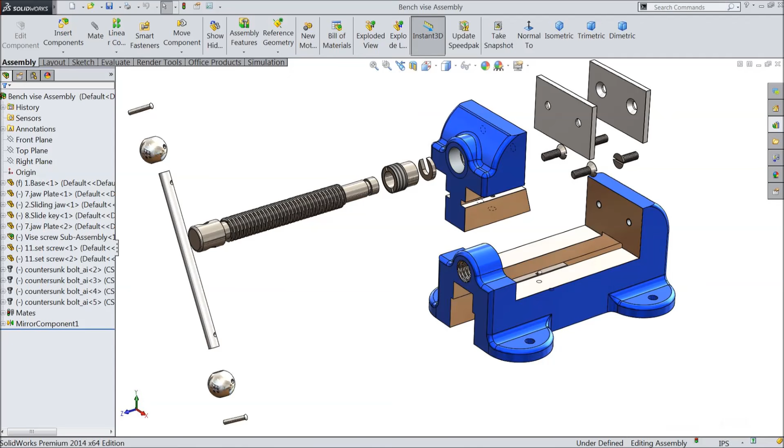So let's see how to do this in Solidworks. We will design each and every part separately and assemble at the end of the video. There are many parts, so we will make each and every part. This is a very beautiful tutorial.

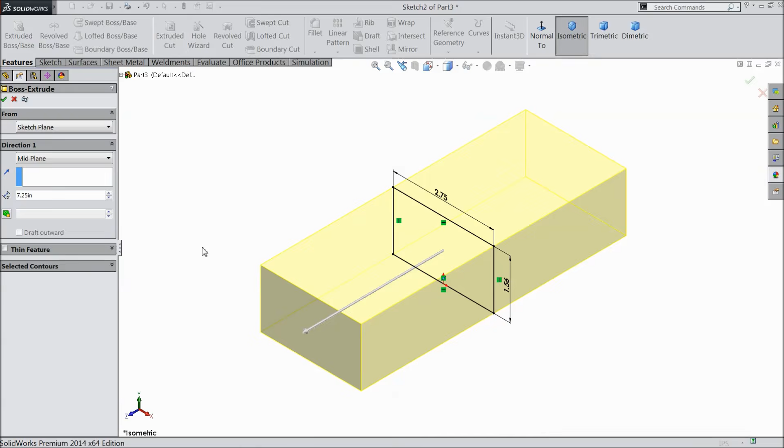Now this is our first part. Just define the base metal chrome plate. That's it. This is the base metal.

Select this back surface, sketch normal, select a line and start from this corner, go back to the point and connect up to here. Exit. Now select this line, curve and line, make relation tangent.

This is the important relation. Now let's define it: 1.25 inch, and overall height 1.75 inch, and this length...

Delete this length and define first radius: 1.375 inch. Okay.

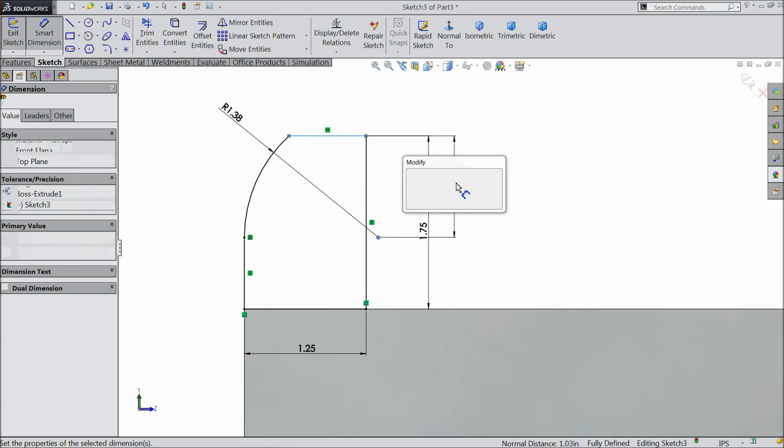Now select this line horizontal. Now define this gap: 1.17887 inch. Okay, this is our perfect design.

Now let's extrude it. Select extruded boss and here choose up to surface. Select this as a surface.

Now select this face, sketch normal. First draw a center line, make sure the line is vertical. Now define the length: 2.25 inch.

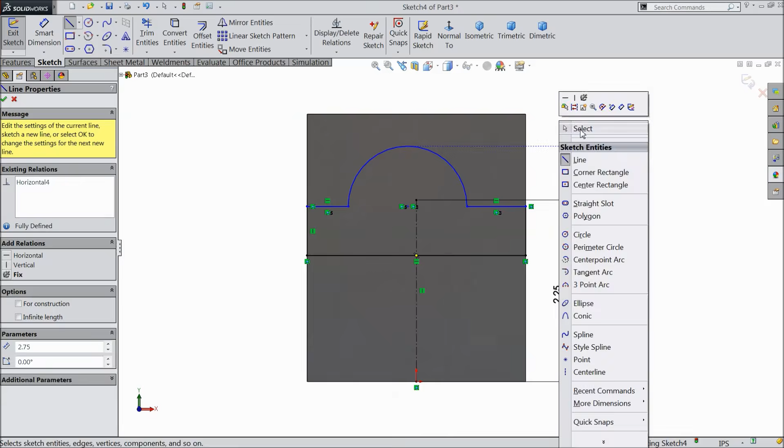Select a line, draw a line up to here and just draw a circle. Connect with this bottom line and connect this end. Exit. Now select these two lines, make relation collinear and one more relation equal.

Now define this radius: 0.687 inch. Now define the height from the origin point: 2.187 inch.

Now the design is fully defined, so let's try to extrude. Choose here offset from surface, make 5 inch, and select offset from surface, select this line, offset from this surface 5 inch, see merge result.

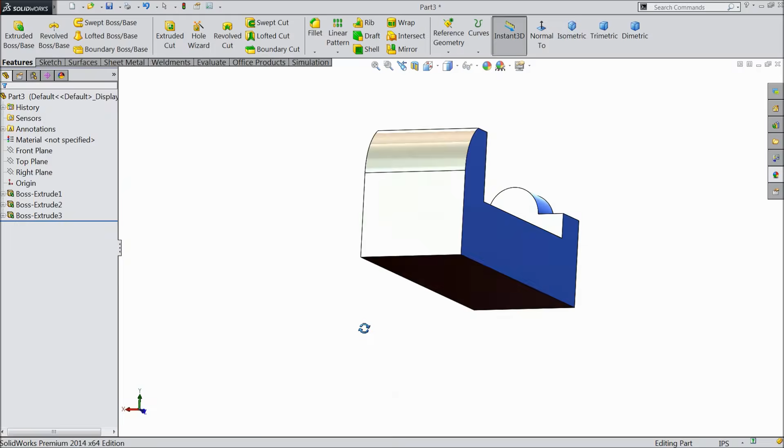Now these faces we will assign some color. Go to paint and define glossy blue. This face also, so that the design looks better.

Now select bottom face, sketch normal, and here we want to draw wings or a base. Let's select circle, draw a circle up to this end, select line, connect this end to this end, exit. Choose trim entity and trim this half circle.

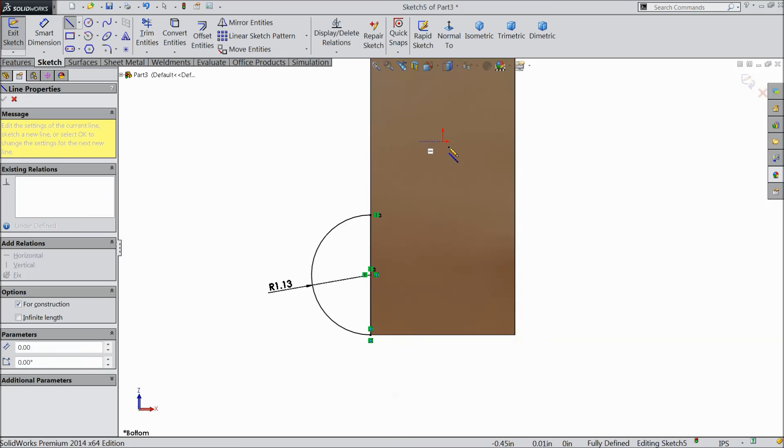Now define this radius: 1.125 inch. Now select, let's draw first, and draw a line.

Now select circle, keep the diameter 0.312 inch, and the distance from this line to this point 2 inch, and the distance from the upper mid point 2.5 inch. Okay, the design is fully defined.

Now select extruded boss. Point 4 inch, reverse direction. Select this material glossy blue.

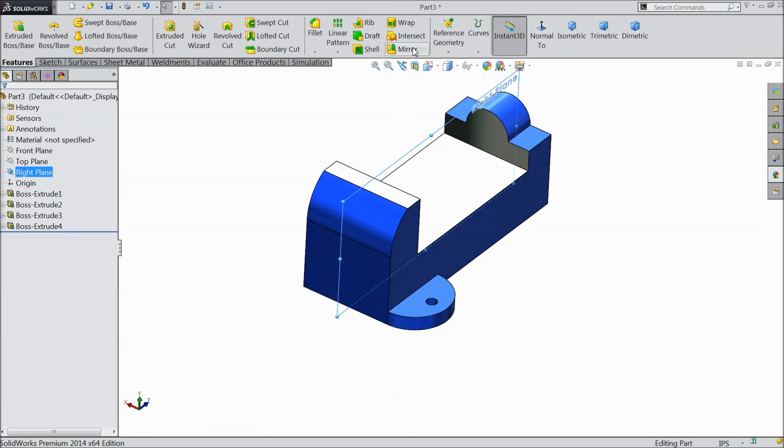Now we want to just mirror this. Choose right plane, mirror, and select extruded boss. Okay, now it is mirrored.

Now these two again we want to mirror. Choose front plane, mirror, select extruded boss, and mirror. Okay, now see the base is already mirrored.

Now we select this face, sketch normal, and here we want to create some cutout for movement, for the path. Make sure it is vertical. Now select a line.

Select this line vertical. Now select these three lines, make relation symmetric. The same for these three lines, symmetric.

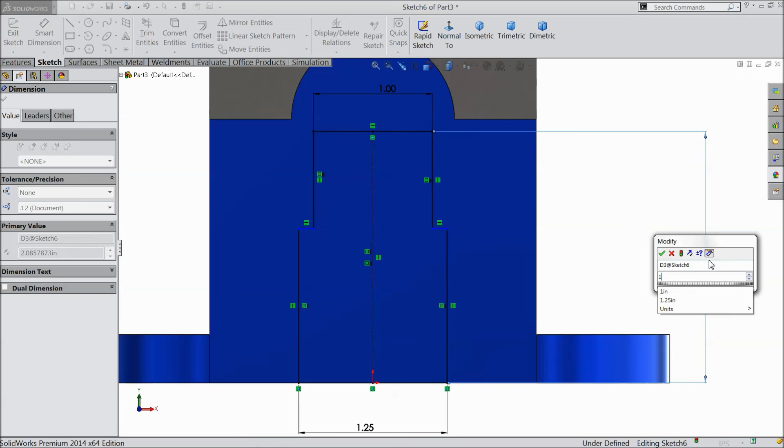Now bottom line 1.25 inch, the upper line length keep 1 inch, and the distance from the bottom face 1.6875 inch, and the same for this second line 1.062 inch.

Now select this line and this line, make relation collinear. Now our geometry is fully defined. So we want to cut, select extruded cut and choose through all. Now see, we cut a cutout. This is the cutout for movement.

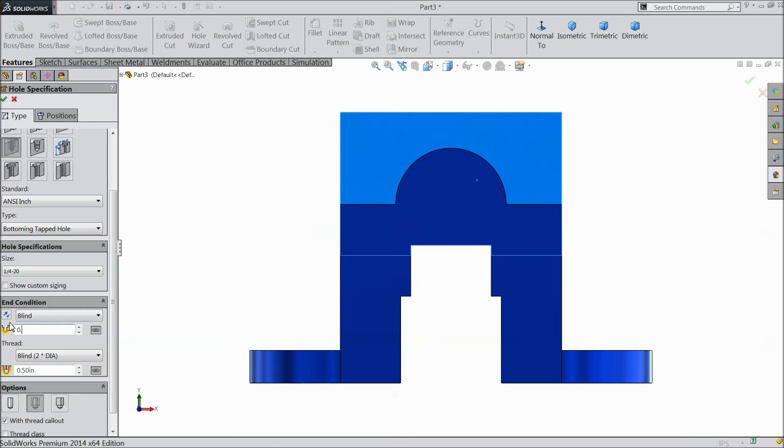Now here we will make some tap holes on this face. So choose hole wizard. Now select straight tap inch, and here choose bottoming tapped hole, and here select 1/4-20. The blind height 0.65, and 0.50 inch. Choose position.

Press escape and first draw a center line.

.75 inch, and the distance from here to this corner, 1 inch. Okay, now select mirror, select this against this line. Okay, now see it is mirror, select OK.

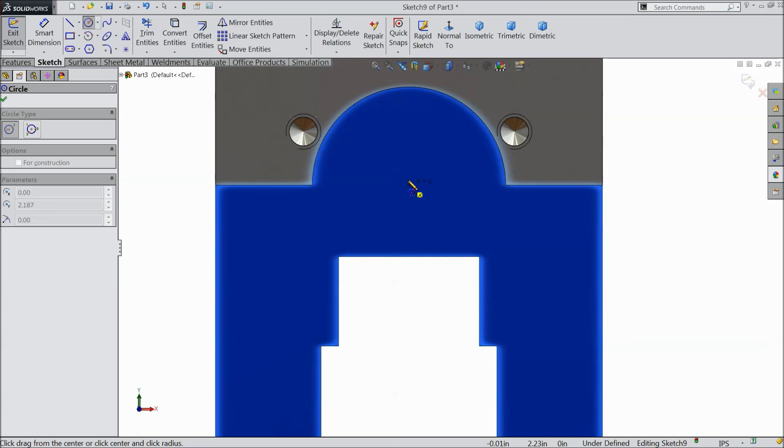Now we can see it here, the hole is created, tapped hole. Now select this face, sketch normal, and here we want to create a hole for thread. Select this circle just and find out this center point and keep the diameter.

.5625 inch. Okay, and select extruded cut and keep here up to next. This is the next part, next face. Now see, the hole is created.

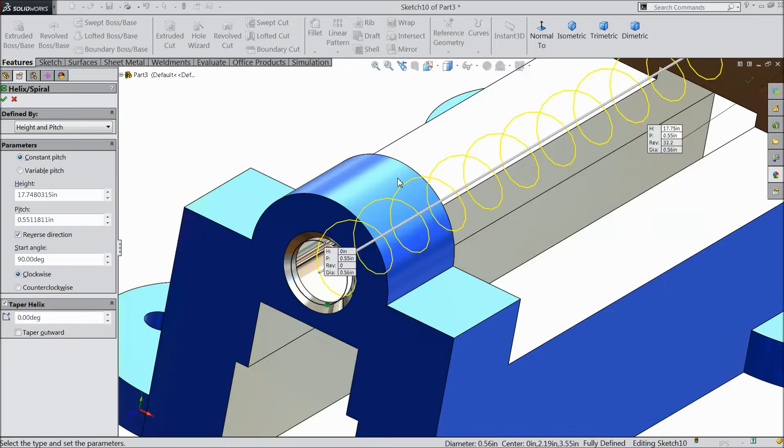First select this face, circle, a sketch, and select this inside circle, convert. Now select helix and spiral. We want to create here paths for thread. So do one thing, select height and pitch constant.

Now select right plane, sketch, normal, and here we will create profile. So select center line and connect this midpoint to this midpoint. Select this line and make relation vertical.

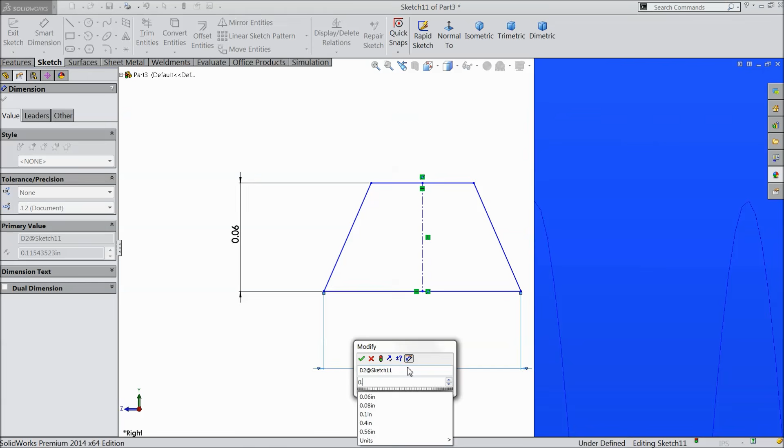Now we will define the height first, 0.0625 inch, and this width 0.079 inch, and let's define the angle. Keep angle 29 degree. Okay.

Now select this point and this and make relation this path pierce. See, it is pierced here. Now exit.

Now just go to feature and select swept cut. Now see here profile is selected and just we will select path. Select path. Now see, it is already calculated the path. Select OK.

Now see, the threads are created inside. Now we will assign some fillets to complete this base.

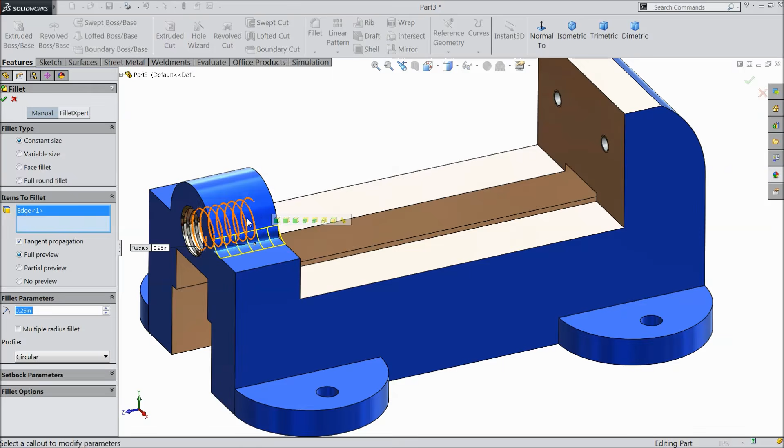Choose fillet, 0.25 inch, select both the end. Select inside, select this side also. Okay.

It may take time. Choose this fillet. Now again choose fillet, 0.125 inch and select this face. Select this face. Select the another direction, this face. See, this all face selected, 0.125 inch. Okay.

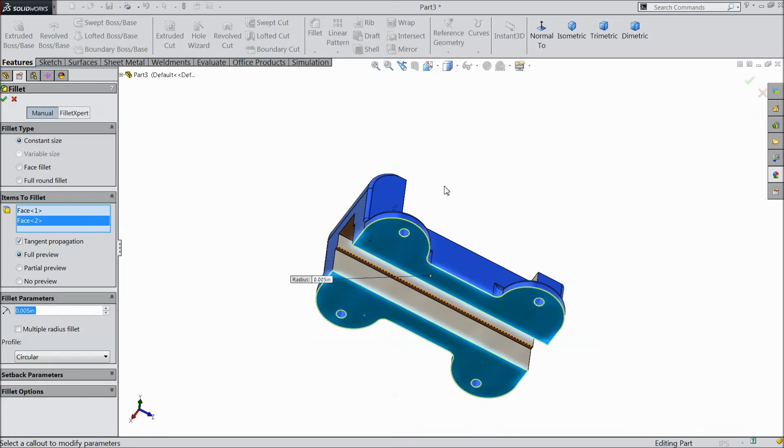It may take time. Again you have to define the color glossy blue. Now we will take one more time, 0.005 inch and select this base, select this base and this base. Okay.

Now that's it. Isometric. Now this is our base. Our base is ready. Base for mechanical vise.

Now save this. Go to desktop and create a new folder, bench vise. Now this is the first part, base. Save. Let's make the next part.

Now we will make the next part, sliding jaw. So choose front plane. Before we will change it to inches. Now select front plane, sketch. First draw a vertical center line. Okay. Now let's start.

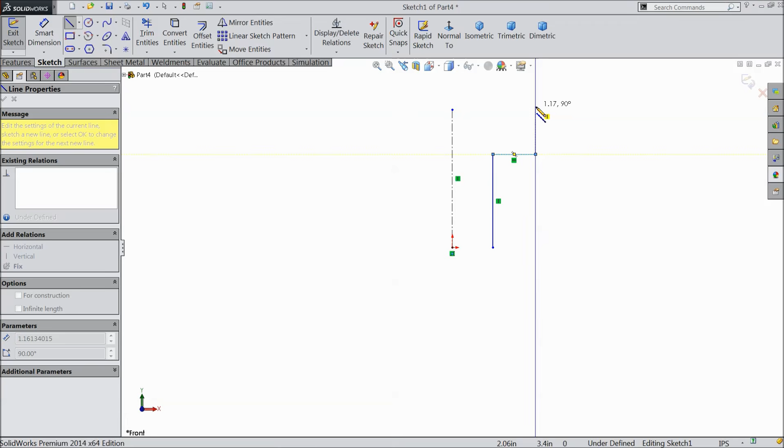Now we will define the height, 1.5 inch, 0.875 inch, and this height 0.75 inch.

Just select these three dimensions, mirror about this line. Okay. Now first select line and connect both the ends. Exit. Now let's define this, 0.996 inch. Okay.

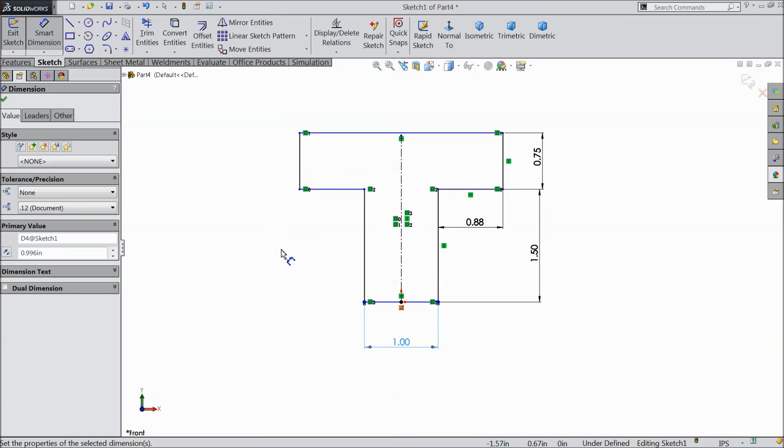Now select these two lines and make this equal. By default it is 2 times. Okay.

Now select extruded boss, 2.562 inch, reverse direction. Okay.

Now select this face, sketch normal, select a line, and exit. Select 3-point arc, connect these 2 points. Exit. Now let's define from this point to this point.

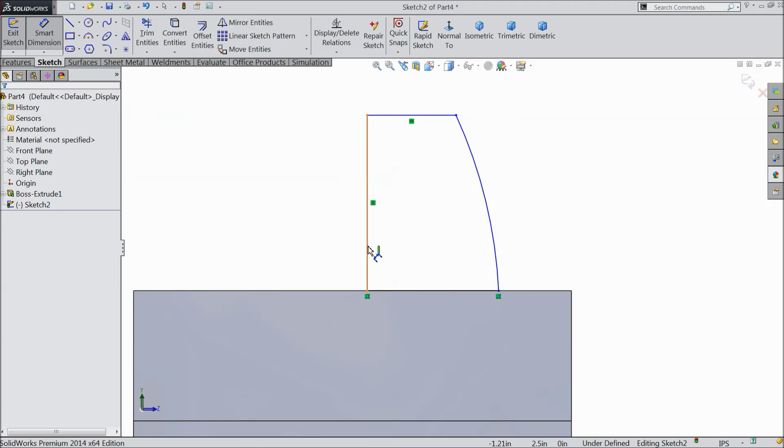Select smart dimension and distance defined from one end, 1.562 inch.

Keep the radius 1.375 inch, and let's make the height from this line, it should be 1.75 inch. Okay.

Now you can drop this, and this is the center point. Now we will try to define this point. 0.125 inch. 0.1875 inch. Okay, this is our exact geometry.

Now select extruded boss, and here select up to surface. Now we will select the next end as a surface. Okay.

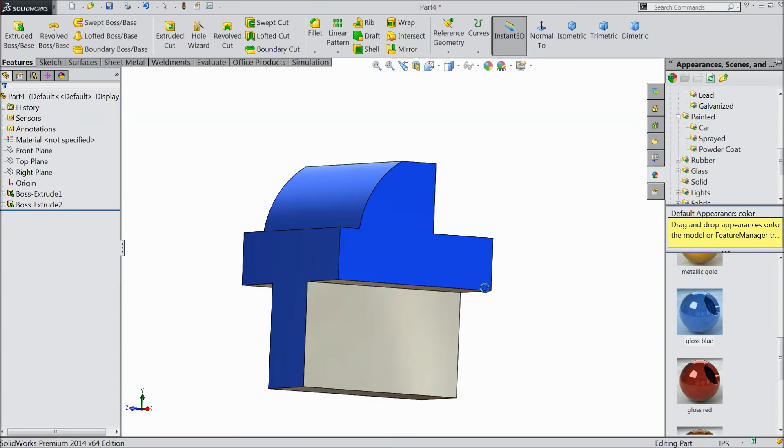The full material we will select, go to chrome finish. Now we will define some other material. Select these faces and go to paint it car metallic glossy blue. This is our material. Okay.

Now select this face, sketch normal. Select a line and start from this end vertical and up to this end. Now define this gap: .375 inch, and the distance from the bottom line 1.375 inch.

Okay, and select extruded cut. Select through all. Okay. Edit this feature, edit feature, and select here flip side to cut. Okay, now see the other portion is cut. This is what we want.

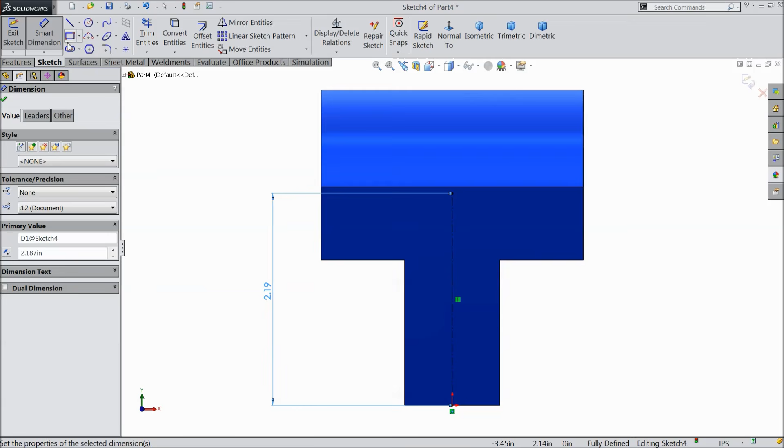Now select this face, sketch normal. First draw a vertical center line and define the length 2.187 inch. Now let's make a circle and define the diameter 0.687 inch. Select circle, line, and connect one end to this end. Choose trim entity and trim this half circle.

Okay. Now select extruded boss and keep here up to surface. Select up to this surface. Okay. And define the material gloss blue.

Now select the same face, sketch normal, and here we want to create a hole. So just define first location, select, just move to this circle and it will show you the center point, and keep the diameter 0.75 inch.

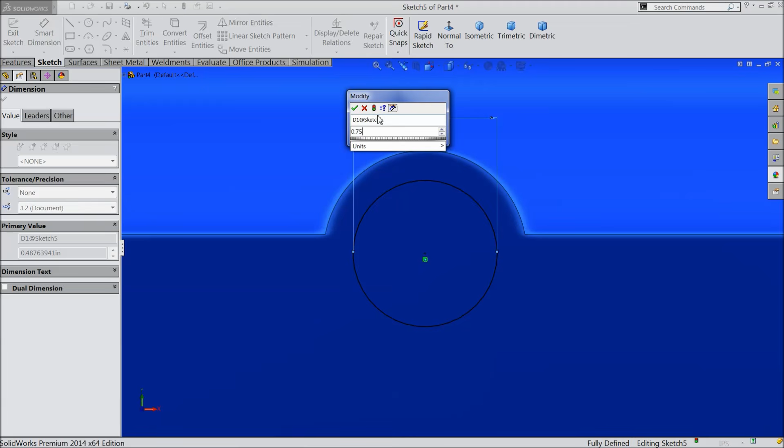I think we need to edit this sketch. This is our previous, but it is actually radius, not diameter, so select into 2. Okay. Select rebuild. Now see it is rebuilt.

Now this sketch we already created. Edit. Select extruded cut. Cut inside up to 1.1875 inch. This is the depth. Okay, see.

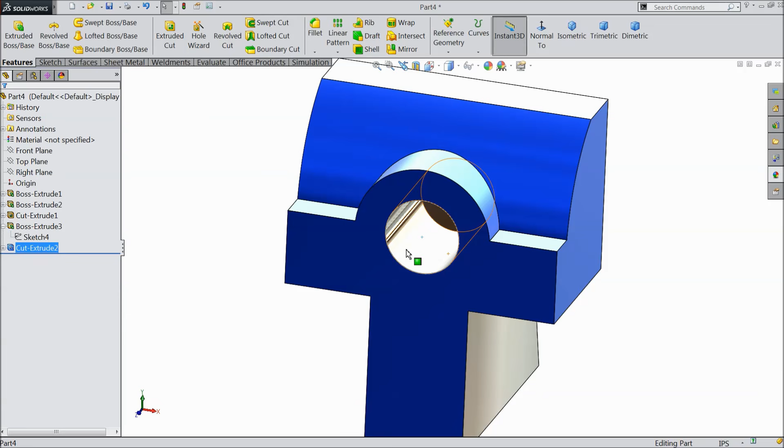Now here we want to create some tapped threads. So what we have to do: select this face, hole wizard, normal, select here tap, straight tap, inch, tapped hole, and go down to 1/1/8 into 7. This is our requirement. Here select custom sizing.

.813 inch, degree 118, and the height blind 0.437 inch and 2.25 inch. Choose position. Now select the position, this is the center of the hole. Select OK. Now see, the tap is created inside.

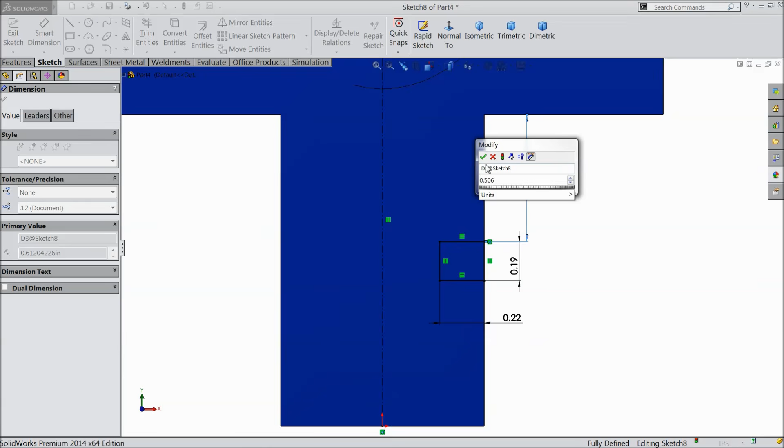Now select this face, sketch, normal. Here we want to cut some steps. First draw a vertical center line, make sure it is vertical. Select corner rectangle. Now select the length 0.218 inch and keep the height 0.187 inch, and distance from here to this line 0.506 inch. OK, now select extruded cut.

Select here through all. See, OK. Now we want to make mirror, so choose right plane, mirror. Select this extruded cut. OK, now see, it is mirror.

Now just reverse this, we want to make some tapped hole here. So select hole wizard. Select straight tap, inch tapped hole, and here select 1/4-20 inch, and select the blind point 625 inch, and depth, thread depth 0.5 inch. Select position.

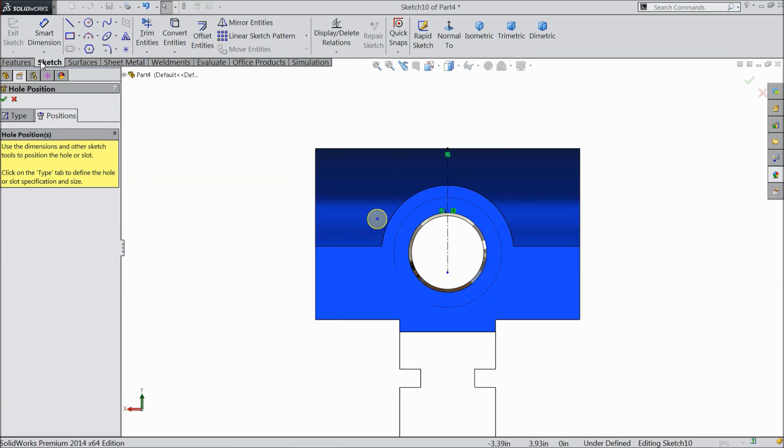Now select one piece here, escape. Select center line. Press point and draw one here, exit. Now define the gap 1.5 inch and the distance from here to this bottom line, define 1 inch. OK, now select this 3 points symmetric. OK, now this is fully defined.

Select OK. Now see, the tapped hole is created.

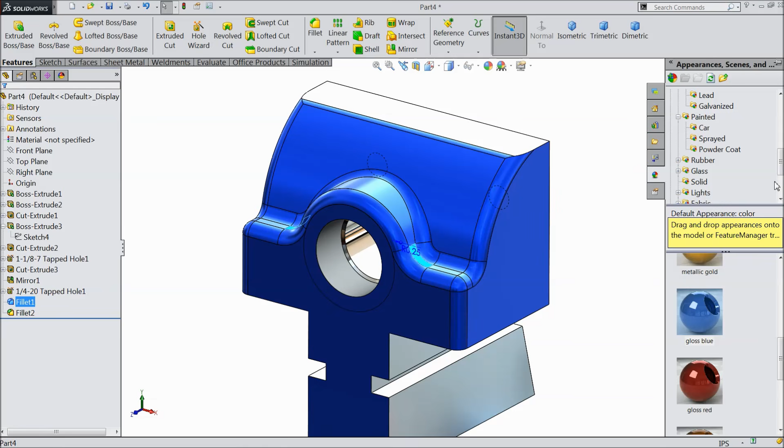Now select fillet 0.25 inch and select these two ends. OK. Again choose fillet 0.125 inch, select this face. OK. And define the finish, both the fillet. OK.

Now here we want to define some, select this face, sketch. First we will make some hole here. Select hole, inch all drill size, and make the hole size it should be 25. Select 25. Okay, and the blind length 1.0625 inch. Select position,

put here, escape, first draw a center line. Now define this distance from upper line 1.1875 and distance from center line 0.625 by 2 inch. Okay, select OK. Now see, a throughout hole is created, a big length of hole. See, this is the hole.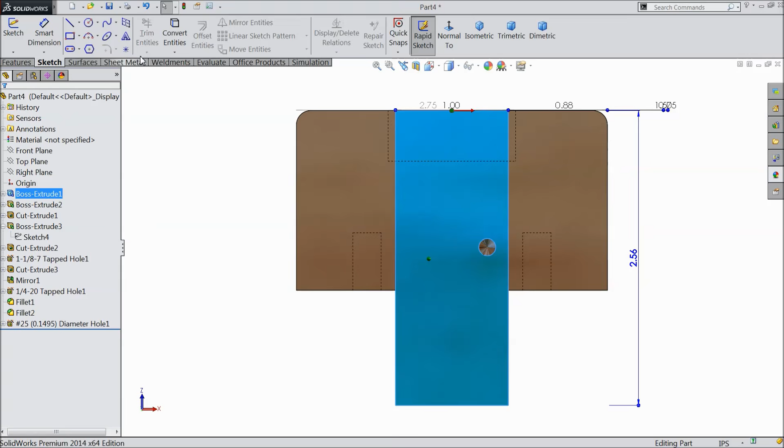Now inside the hole we want to create some tap also. So what we have to do, we have to again select the same face, sketch, select hole wizard, and this time select straight tap, inch tapped hole, and here select 1/4-28 and blind length 0.75 inch and this 0.5 inch. Select position and select this center point. Select OK.

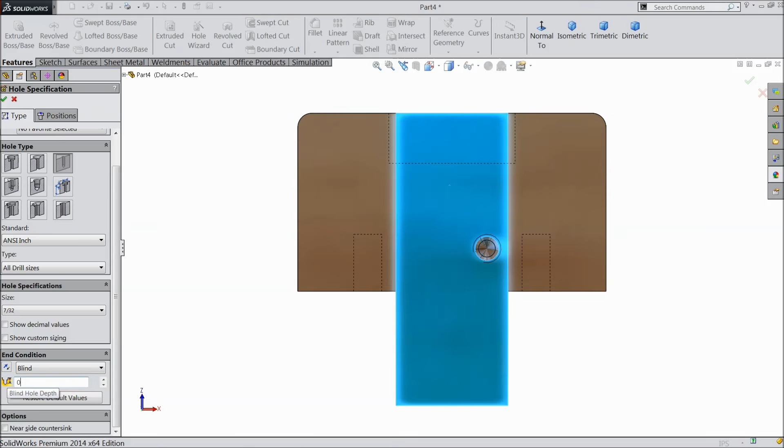Now inside we created some tapped hole. Now again select the same face and we want to create one more hole. This time choose hole, inch all drill size, and select here 7/32 inch, and keep the height length 0.375 inch. Select position and select, find out this midpoint, select OK. Now here select OK. Now inside we created 2 holes and 1 tapped hole. That's it.

Now we want to make a mirror of this. So how will we do it? Mirror, select right plane, mirror, and select last 3: 1, 2, 3. OK. Now see, it is mirror.

Now the last we will select fillet 0.005. Now here you can select all these faces. Select OK.

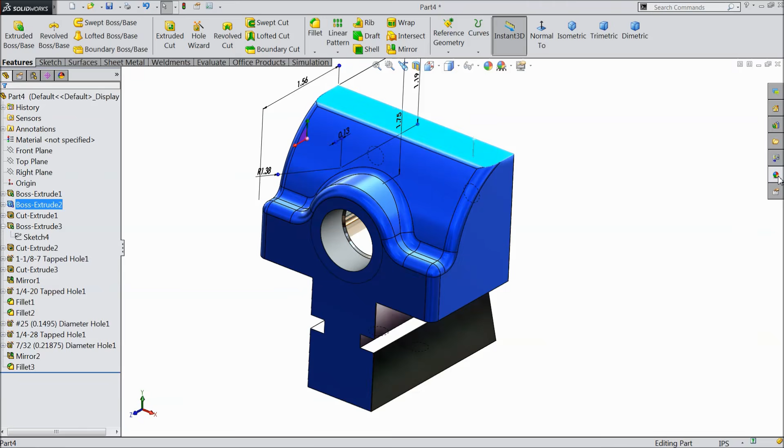Now this is your moving jaw, also called sliding jaw. Save this as bench vise part number 2, sliding jaw.

Let's go for the next part. Now let's make the third part, bench vise screw. Select right plane, sketch, select a line and draw a horizontal line from one end to the origin point, a little up, then go down, and up to here. Exit. Now this is the geometry.

First we will define the overall length, 6.25 inch. Now let's define this, 0.75 by 2 inch. Let's define this, 0.5 by 2 inch. 0.812 inch.

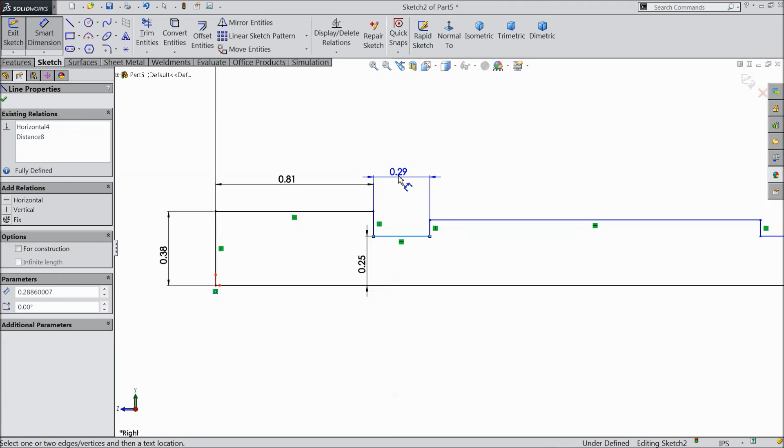Okay, now let's drag here. Now this, 0.25 inch. Okay, now we will select one relation. Select this line and this line, these three lines, and make relation collinear.

Now first define this length, 0.25 inch, and this length, 0.131 inch. Now first define this distance, 0.6875 by 2 inch. Okay, now define this length, 0.375 by 2 inch.

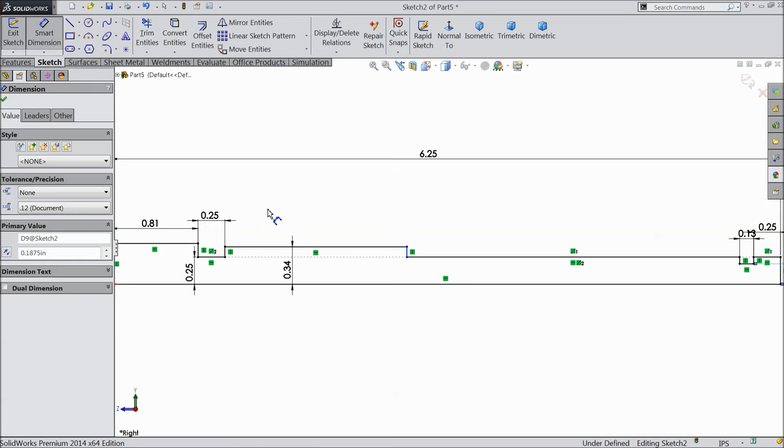Now let's define this length, 0.937 inch. Okay, and select revolve boss base and select this bottom line as the axis. Okay, first we will define the material. Go to metal, steel, polished steel. Okay, this is our material.

Now here we will create thread. So select this face, sketch, select this outer line, convert it, go to feature, and here you will find helix and spiral. Now we will create the thread path for threading. Select height and pitch, constant pitch, height same 4.025 inch, pitch 0.125 inch and 90 degrees clockwise.

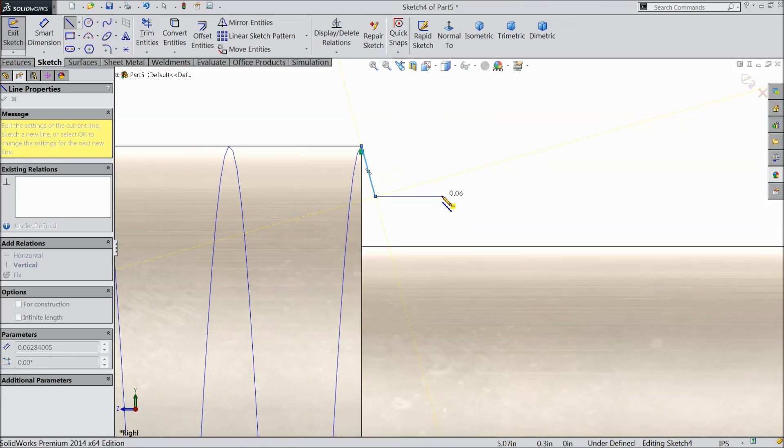Okay, now select right plane, sketch, normal, and here we will create the profile, thread profile. So select a line, select this point, and connect with this point. Select this line and make relation horizontal. Now first draw a midline, select this midline and make relation vertical.

Now define first gap, 29 degrees, this is the angle. Select these three lines and make relation symmetric. Now we will define the height and length, 0.079 inch. Now the height, 0.0625 inch.

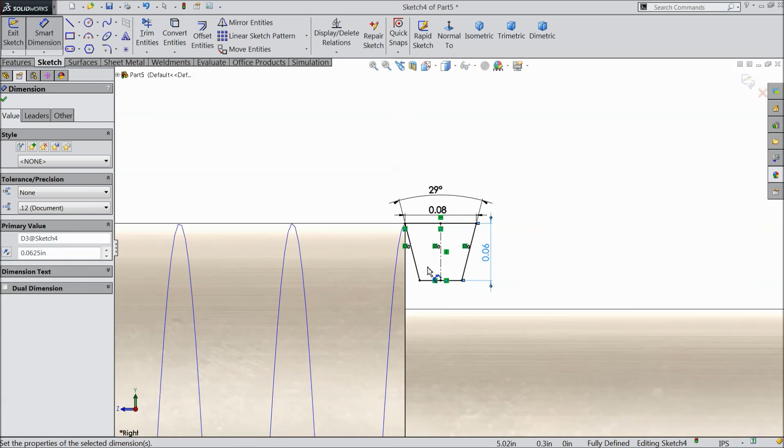Select OK. Now go to feature and select sweep cut command. The profile selected, just select this profile path and see it is calculated. Select OK. Now it's finished, see, the thread is created.

Now select top plane, sketch, normal, and here we want to create a hole. Draw a vertical center line. Select circle and draw a circle. Now let's define, 0.3438 inch and the length 0.406 inch. OK, and select extruded cut and select here through all both. Now see, OK.

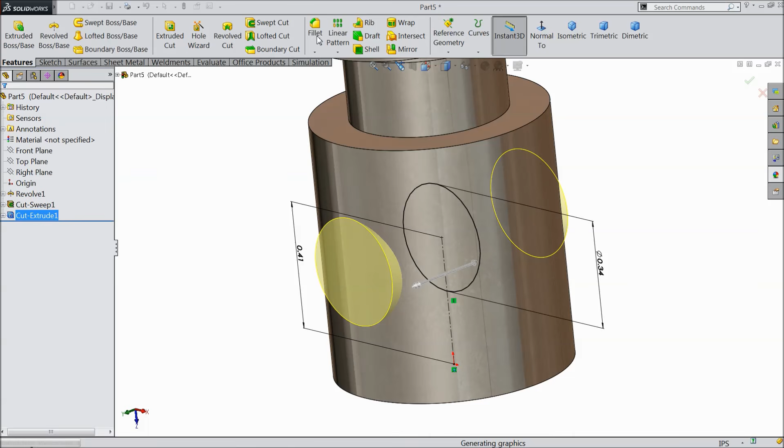It's taking time, maybe computer is slow or some reasons are there. After that we want to select fillet this end. So now select fillet, 0.062 inch. OK.

Now this is our part, it is ready. Now you can see this is the vise screw. Now save this, save as part number 3, vise screw. And let's move for the next part.

Now let's make the next part, handle rod. Choose top plane, sketch and draw a circle. First make dimension in inches. Now edit. Now define the diameter, 0.312 inch. Now let's extrude it.

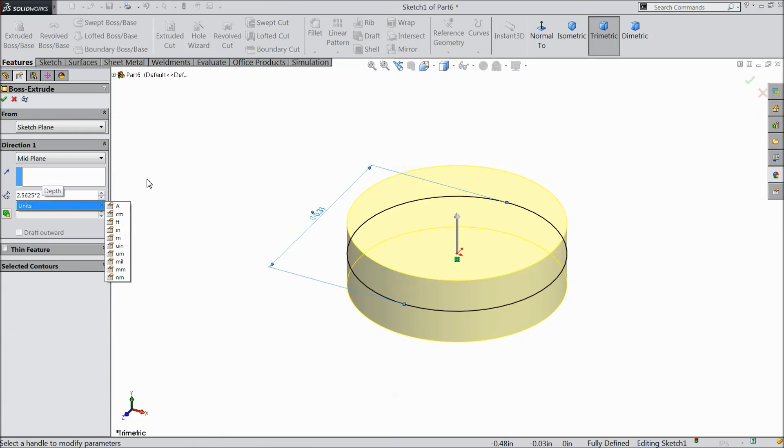Keep mid plane, 2.5625 into 2 inch. Select OK. Now see.

Now select front plane, sketch, normal. Now here we want to create a hole, so select corner rectangle and draw a corner rectangle and define this. The hole we will define 0.125 by 2 inch. OK.

Now define the distance from here to top line, 0.341 inch. That's it. OK. Now select revolve cut and select this line. See, the hole is going to cut here. OK. See, the hole is already cut.

Now we will just mirror this hole. Select top plane, mirror and select this hole. Now see, it's going to mirror opposite direction. Okay, now the rod is finished.

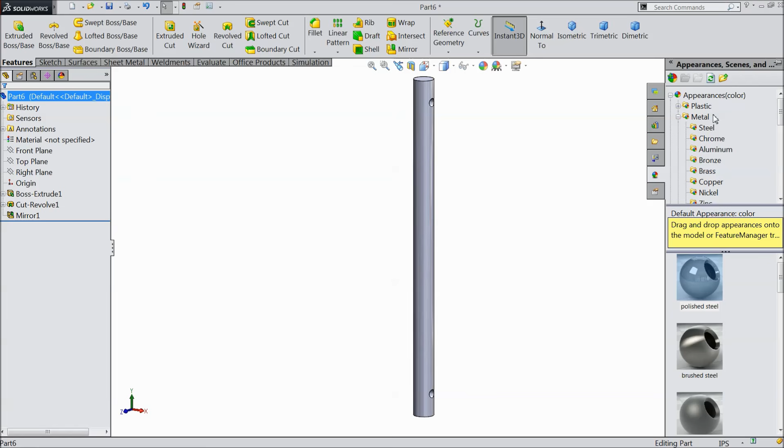We will assign some material. Go to chrome, select brushed chrome. Now save this part, save this part number 4, handle rod. Let's make the next part.

Now here we will make the pin for handle rod. So let's start. Better first select dimension in inches. Select right plane, sketch, select line and draw a line up to this circle. Draw a curve, come down,

exit. Now we will define this curve, 0.125 by 2 inch. The overall length 0.375 into 2 inch. That's it.

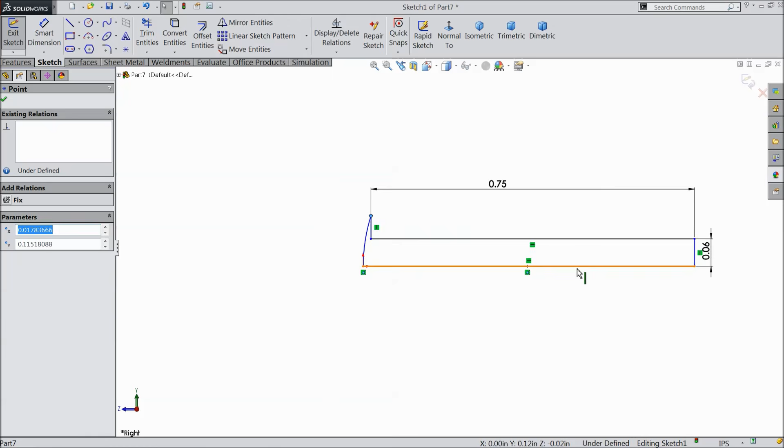Now define this gap, 0.031 inch, and define this distance, 0.084 inch. Okay.

Now select revolve boss base and select bottom line as the axis. Okay, and define this chrome plate. Now save this as part number 5, pin.

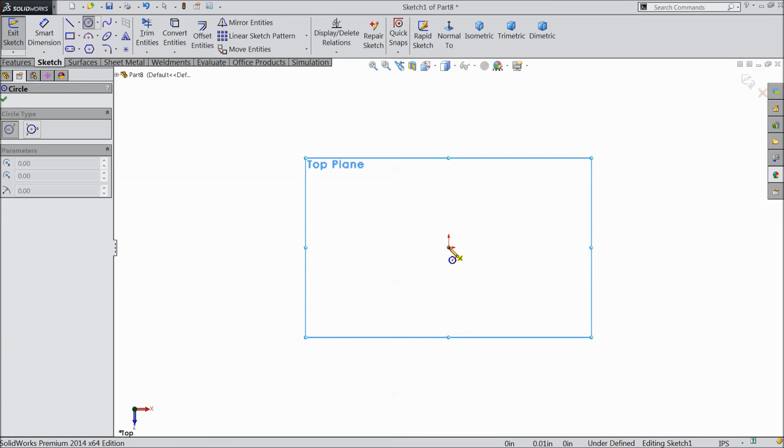Now the next part is knob. Now here next part we will make knob, handle knob. So select top plane, sketch, select circle and draw a circle. Draw a center line and draw one more line. Now choose trim entities and delete this half circle, and this is our circle.

Okay, now define the radius, 0.375 inch, and let's define this gap, 0.312 by 2 inch. That's it. Now select revolve boss base, this center axis already selected. Okay, now see.

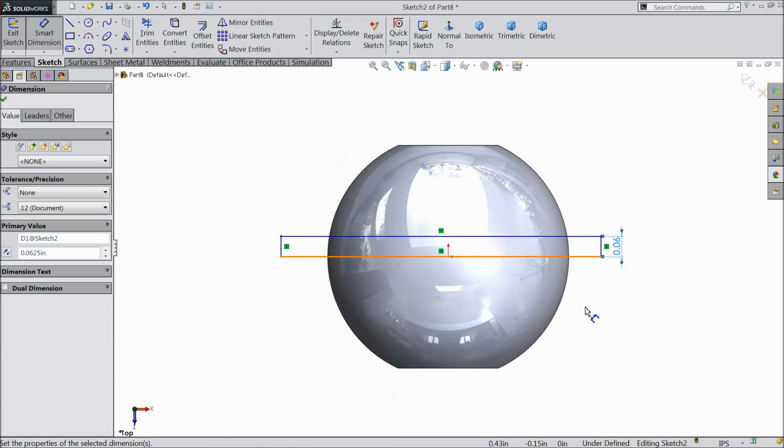Now select top plane, sketch, normal, and here we want to create a hole. So we can directly select corner rectangle and draw a rectangle, just pass through origin and define this 0.125 by 2 inch. Select revolve cut and select this line as axis. Now you can see the hole is going to be created. This is the hole.

Define the raw material chrome plating. This is the chrome plate finished material. This is our knob. Now save this part, number 6, knob.

Let's go for the next part. Now here we will make the next part, jaw plate. Select front plane, sketch, and select corner rectangle, and draw a rectangle, must pass through origin.

Select the origin point and this line and make relation midpoint. Now we will define the length 2.75 inch and the height 1.75 inch. Extrude it up to 0.187 inch, reverse direction.

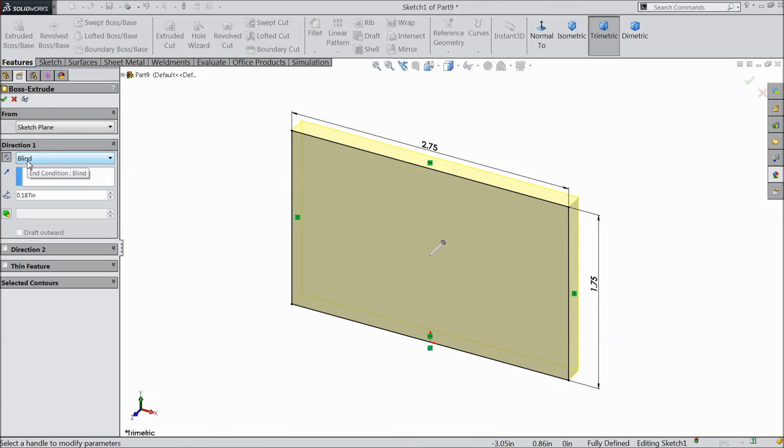Now select this face, normal, and here we want to create some countersunk hole. Select hole wizard and select this countersink inch, and select here flat head screw 82, size 1/4 inch.

Normal, end condition through all. Go to position, press escape. First draw a center line.

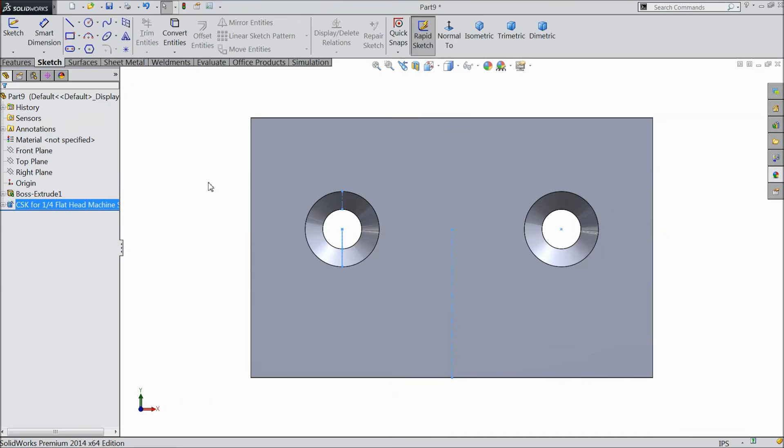Now we want to make some fillet, 0.005 inch, and select this all 4 faces. Select OK.

Now let's define the material. Chrome plate, chromium plate cast, this is better material. Now save it, part number 7, jaw plate.

Let's start next part. Now here next part is slide key. For sliding there is a key, so let's make it. Select right plane, sketch, and go to sketch and select center rectangle and draw a rectangle from origin point.

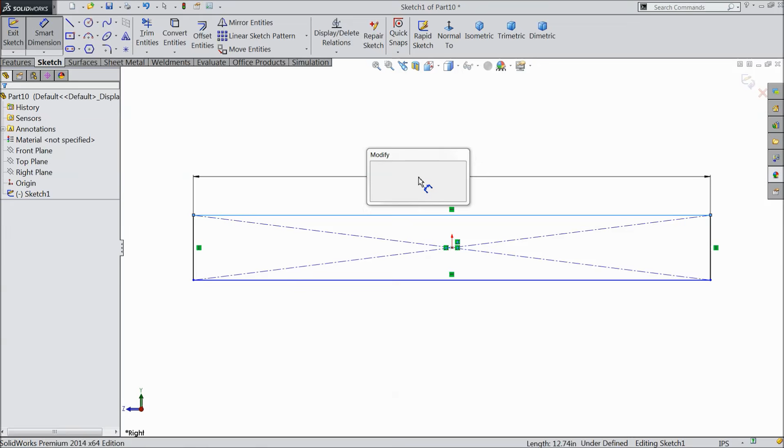Let's define the dimensions in inches, then edit sketch. It's simple. 0.312 inch and the height 0.34 inch. Extrude it, choose mid plane, 0.85185 inch.

Now select this face, sketch, normal, and here we want to make one groove, so select corner rectangle. We want to make cutout.

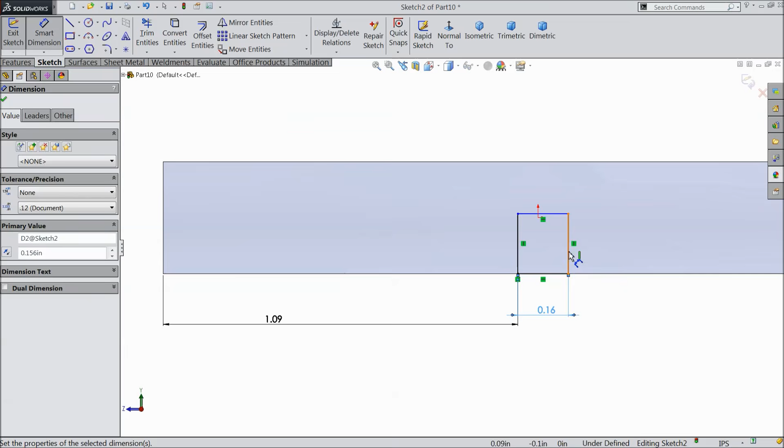Let's first define the gap distance from one end, 1.094 inch, the width 0.156 inch, and the height 0.125 inch. Select extruded cut and choose here through all.

Now see, our slide key is ready. Just assign the finish material, polished steel. Now save it. Part number 8, slide key.

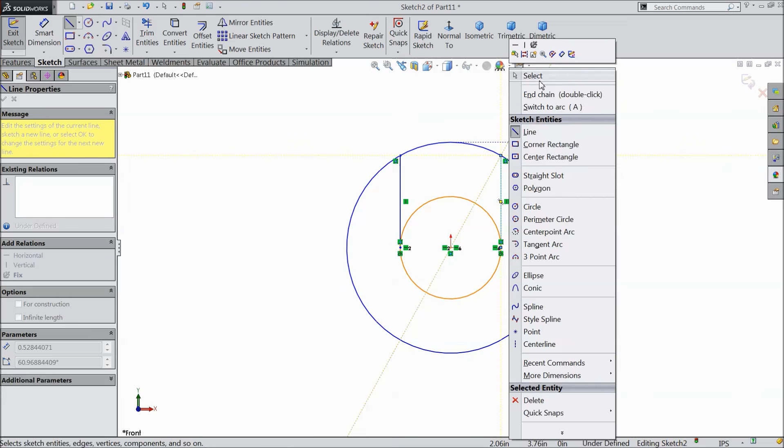Now here we will make the key for rod axle. Select front plane, sketch. Draw 2 circles. Select a line and draw a vertical line, connect with upper circle, and draw the same line from up. Now choose trim entity and trim this.

Now first define the outer radius, 0.359 inch, and let's define this gap, 0.39 inch. Now select extruded boss and extrude up to 0.125 inch. Select polished steel. Now save this part as a key.

Now here we will make the next part, collar. So let's start. Choose front plane, sketch, and draw here 2 circles and define the diameter. Select inner diameter 0.515 inch and outer diameter little bigger, 0.812 inch.

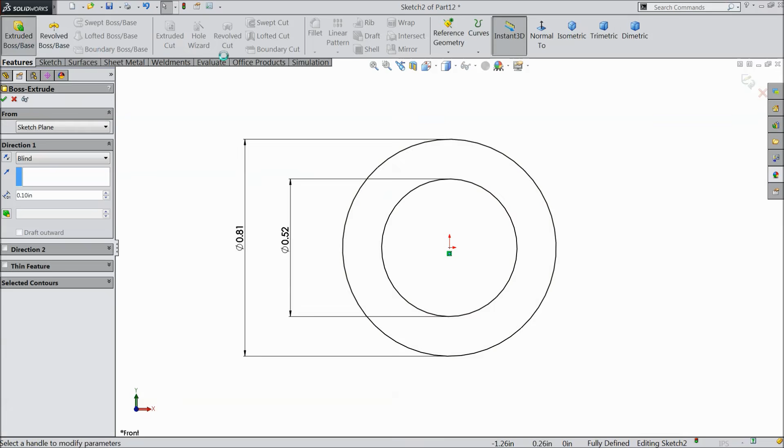Select extruded boss and extrude up to 0.375 inch, but make sure reverse direction. Now in top face we want to make some thread, cosmetic thread.

So do one thing, just go to insert, annotation, cosmetic thread, and here select the edge, none, 0.767 inch, and blind, make 0.375 inch. Now select, go to document property, detailing, and select shaded cosmetic thread. Now see, you can see here cosmetic thread.

Now select the back surface, sketch, inside circle, convert it. Select circle and draw one little bigger circle and keep the diameter 0.718 inch. Now let's extrude it.

Extrude this portion up to, let's say, 0.437 inch. Now we want to make some cutout for key.

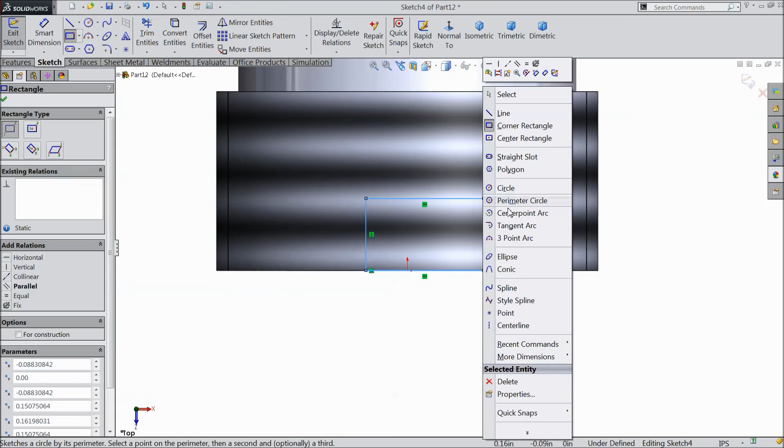So select top plane, sketch, normal. Select here corner rectangle and draw a rectangle. Select origin point and select this bottom line and make relation midpoint.

Now let's define 0.093 inch and the height should be 0.125 inch. Now select extruded cut. Select here through all, both directions we want to cut.

Now see, define the material. Let's make polished steel. Now save this part. This is part number 10, collar.

Let's make the next part.

Set screw. Choose front plane.

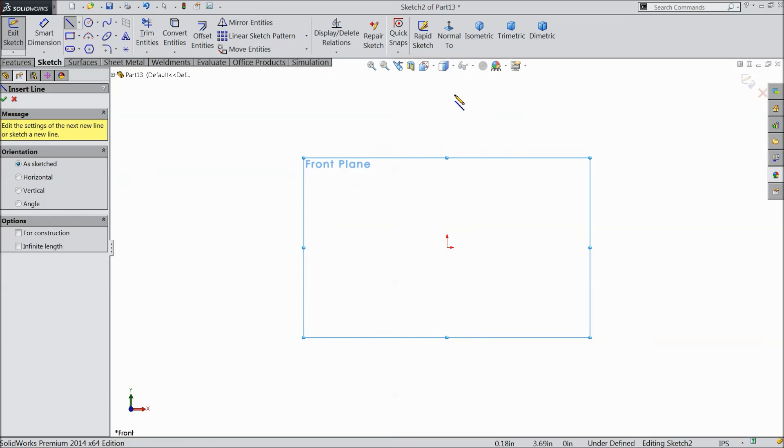Select line. Draw first a vertical line up to the origin point, and draw a curve up to this point. Now select this center of curve and this line, make relation coincide.

Now let's first define the overall length, 0.75 inch, 0.375 inch, the width, 0.216 by 2 inch, and define this gap 0.142 by 2 inch. That's it.

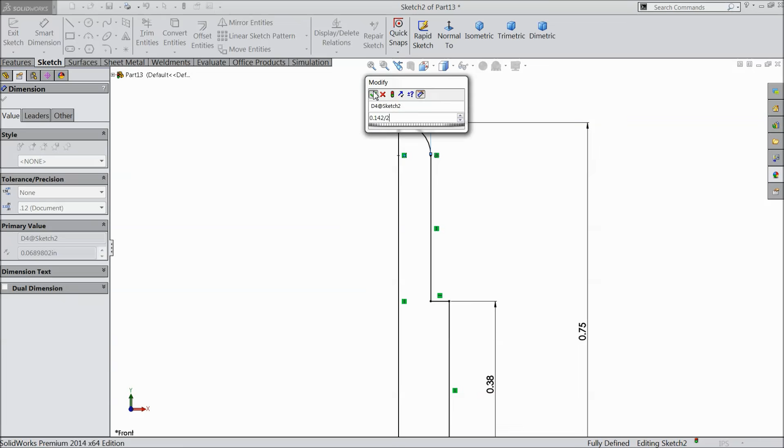Select revolve boss base. Select this line as an axis. Now we will define some cosmetic thread.

Go to insert, cosmetic thread. Select this edge, inches, machine thread, and 12 by 24 inch. Select through all. Okay.

Go to document property detailing and select shaded cosmetic thread. Now see, we can see the shaded cosmetic thread here.

Now again choose front plane, sketch, normal, and here we want to make some cutout. So choose corner rectangle and draw a rectangle.

Select origin point and this line and make relation midpoint. Now define the dimension, 0.031 inch and the width 0.046 inch. Okay, and select extruded cut.

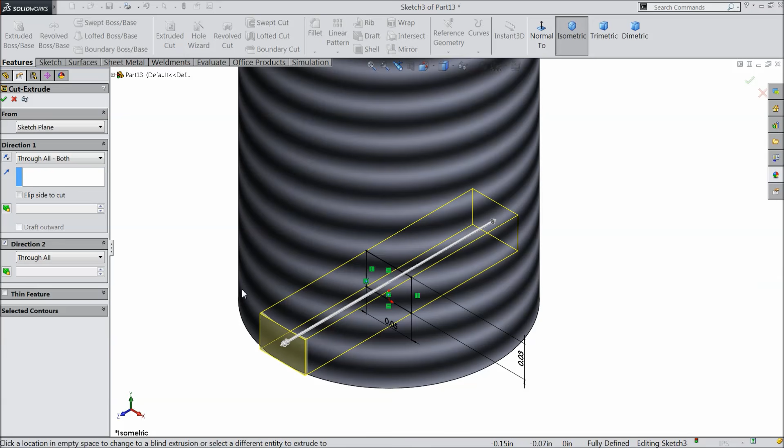Select here, through all, both directions. We want to make a slot. Now see, the slot is created.

This is kind of set screw. Now let's define the material. Satin finish stainless steel. Save as part number 11, set screw.

Now here we will start the sub assembly of handle rod. So select new part, assembly. Okay, and this is the window of SolidWorks, the assembly window.

We will find our bench vise. Now select our first part, vise screw. Now by default it is fixed.

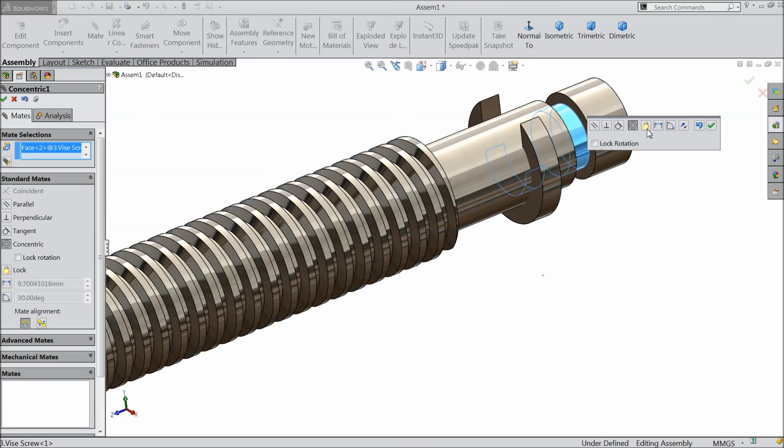Now insert the next part, key. Select mate, select this face and this face, coincident relation, concentric, OK. Now select this one face and one face, coincident relation, OK.

But it is rotating around this, so select right plane, press Ctrl key and right plane of both the parts, select mate. Now it is coincident relation, OK.

Now let's insert the another part, handle rod. And select here pin and knob.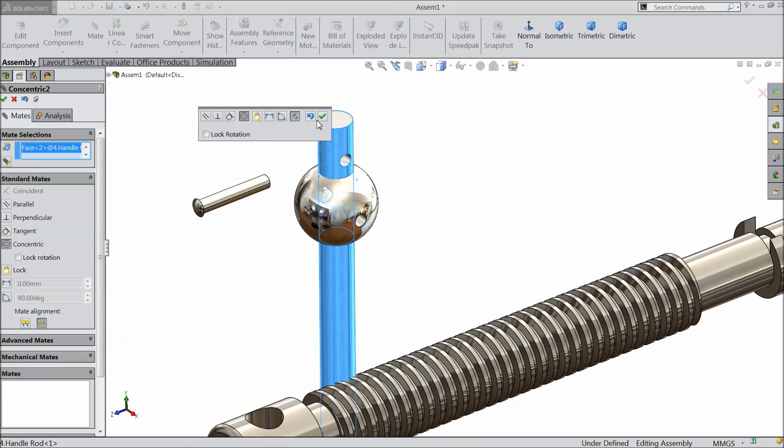Select this hole, mate, and this rod. Concentric relation, OK. Select this hole and this hole. Concentric relation, OK. Select this pin and this hole. Concentric relation. Now just drag pin outside.

Select this top face and this back surface of head. See here, OK.

Now we will do one thing, just mirror all these parts. So select handle, and select this top plane of handle and just select mirror component.

Here we will select knob and select this pin. Select here one option, next. See, we can easily see the preview. Select OK. Now this is fixed.

Now we will create one relation. Select mate, select this face, rod and this hole, and make relation concentric. OK.

But it is moving up and down, so we will do one thing, we will define some relation. Select the top plane of handle and just go to vise screw, press Ctrl key and top plane of vise screw.

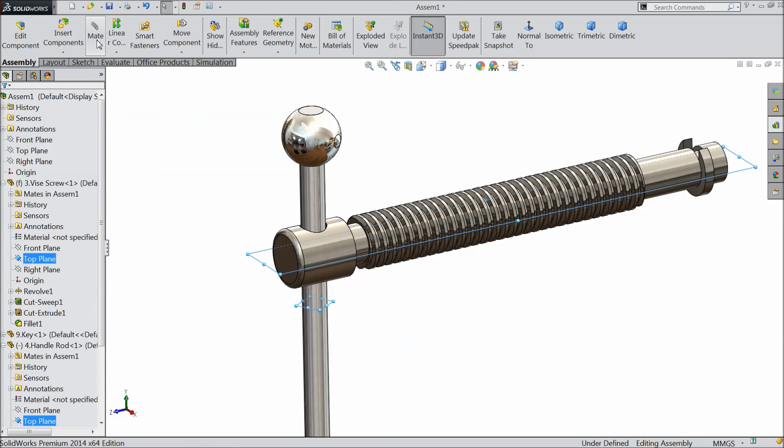Select mate, go to advanced mate and select here distance, 1.51 inch, minus 1.51 inch. Select here OK.

Now let's try it. It's up, down. See, this is the maximum and minimum limit. It will not go beyond that. So our part is ready.

Now save this part. Vise handle or vise screw sub assembly. Save.

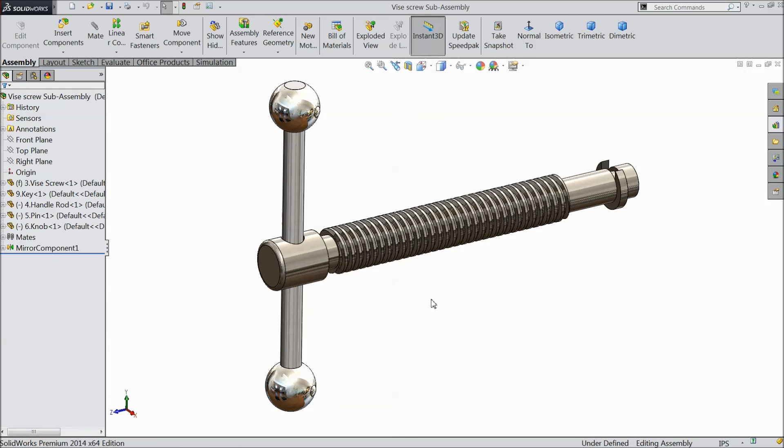Better add one more part here, collar. Now choose mate, select this hole and this, concentric relation. Okay.

Now select this face and this face, coincident. Okay.

Select the top plane, press Control key and top plane of screw, make mate, coincident. Okay. Okay.

Now select save. Now this is our sub assembly. So let's start the final.

Now let's start the final assembly of bench vise. Assembly new. Now bring the first part, base.

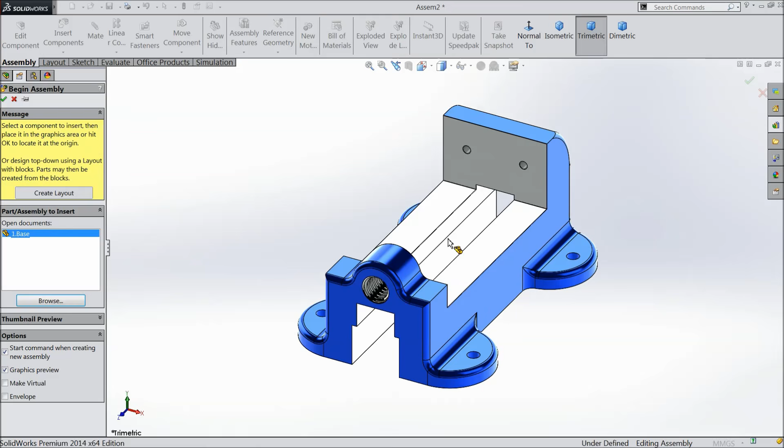Insert the next part, let's say jaw plate. Select mate, coincident.

Coincident. Now the jaw plate is fixed. Now let's bring the next part, sliding jaw. Control key and select slide key.

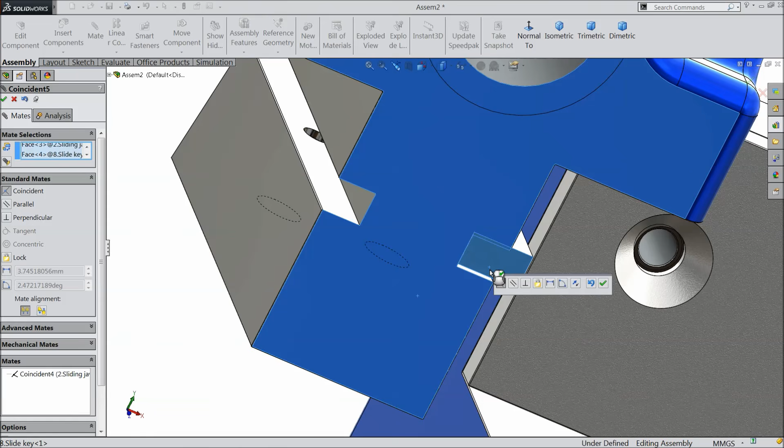Now just rotate this slide key. Bring here. Select this inside face mate, this face, coincide. Select this face and this face, coincide.

Now select this bottom face and this face. See, it is fixed here, and see the hole also looking very well.

Now select this component, right plane. See, now we will just mirror this part. So just go to mirror component, select here component and click next. See, we can see the preview here. It's easily visible. Select OK. Now it is fixed here.

Now select this face mate, this face. Relation is concentric, coincident.

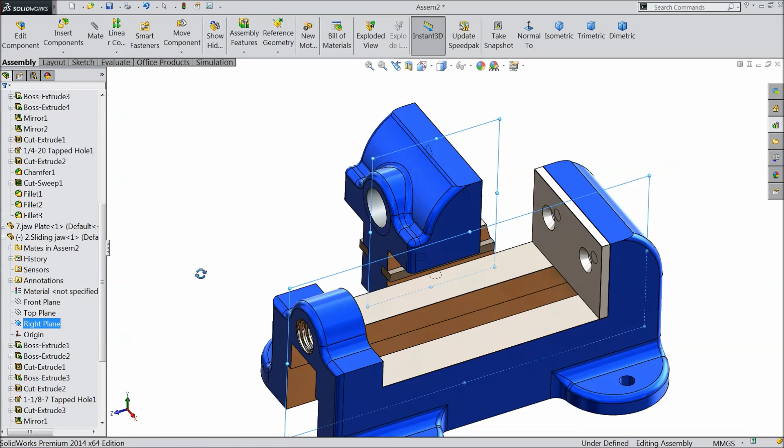Now we will select both the axis. So first we will select base, right plane of base, press Control key and right plane of sliding jaw. Both the right plane we selected. Select mate, coincident.

Now it is moving here and there, in both directions. Now we will make some limit. So go to advanced mate, select here mate, select this face and this face.

Now define the maximum and minimum. Maximum limit, let's say 3.06417 inch and 0 inch. Select OK, OK. Now let's try. See, this is 0 limit, this is maximum. So now this is fixed.

Press Ctrl key, select this part and copy. First rotate this part. This is the position like this. OK. Now choose mate. Select this top face, this face, this face and this wall. Coincident. Select this face and back surface. Coincident. Now this is fixed here.

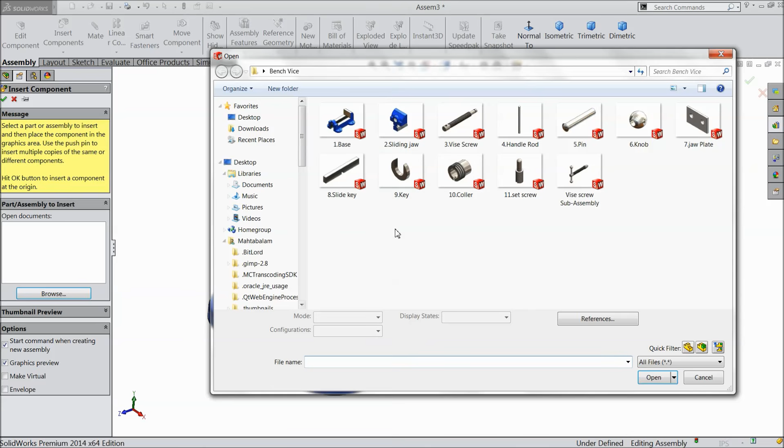Now insert the next part, vise screw sub assembly. Select this top face, surface, mate and select this face. Concentric, OK. Now just take it out and select the inside wall and this wall. Make relation coincident. Now see, it is moving along with this sub assembly.

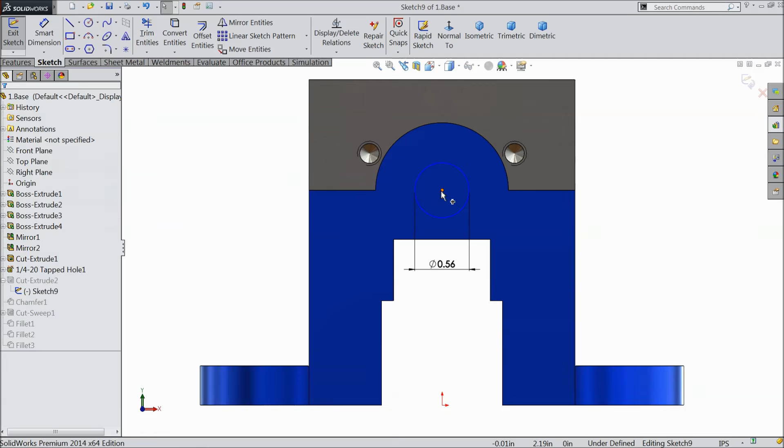Now here we want to create one important relation. Now here we will do some editing. See, this is not perfectly matched. So do one thing, right click on base, open and select here one part, this whole cutout, edit, normal. Select this coincident mate and delete. Now see, it is rotating. So just rotate.

2.25 inch. OK. Now select this center point and origin point, make relation vertical. Select exit. It may take time because we already did the threading. That's it. Now save this part and exit. It is asking, would you like to rebuild? Say yes. Now see.

Now let's try. Now after editing this part, just go to mate and delete this relation first, this concentric relation. OK. Now it's moving. Now select this face, mate and select this inside face. Concentric relation, OK. Now go to mechanical mate, select screw, distance.

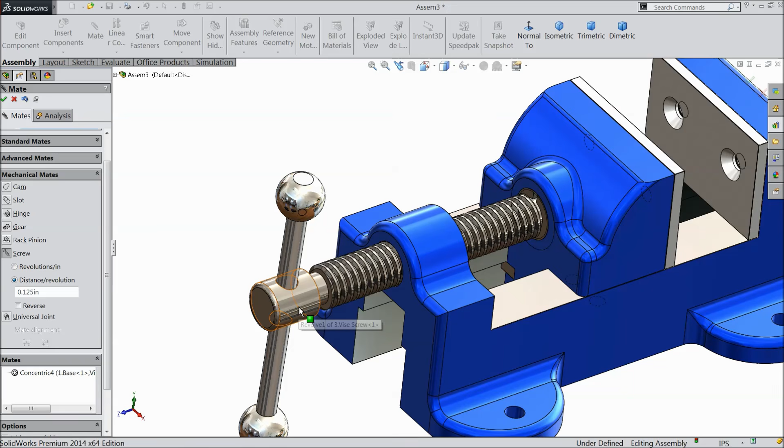0.125 inch, select this face. Now right click on the component, select hide the component and select this inside face. Now again change 0.125 inch, select OK, OK. Now where is this component? Right click on the component and select here show. Now let's try either it's — see, we created the screw relation.

Okay, so let's go for the next part. Select mate, insert component, and let's see what exactly the balance part. Select set screw. Okay, press Ctrl key and drag and make one more. Now this set screw we have to make.

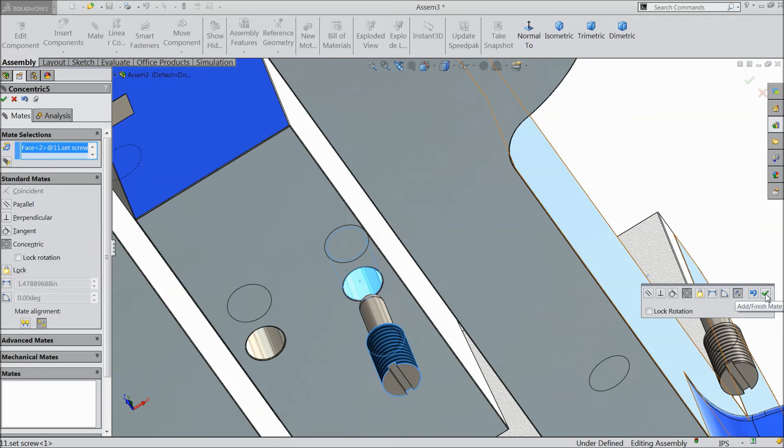Select mate, select this face and this face. Concentric relation, same as for this concentric relation. Okay. Change transparency.

Select this face mate. Select this dome, and this is the relation tangent. Okay, again select this dome and select inside, see inside face. Now you can see inside face, this is the cap tangent relation. Okay.

Now right click on this, change transparency. Now you can see those parts fixed inside. Change transparency. Now see those all parts, everything fixed.

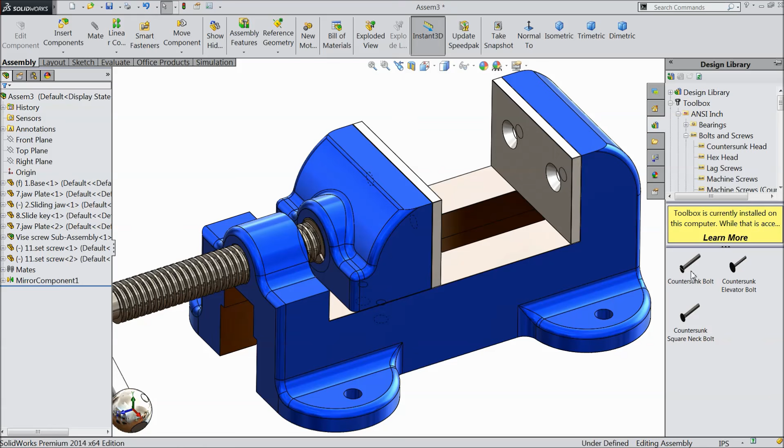Now here we want to fix some countersunk screw. So go to design library, select ANSI Inch, bolts, and select here countersunk head, and here countersunk bolt. Cancel it. Again drag and keep here, so the dimension will be easily handled. Select 1/4-20 inch slot and length make 0.75 inch.

Select here schematic, means screw. Okay, now select here one more, 2 and 3. Now cancel. Total we need 4 number of screws.

So select mate, select this face and this face. Select reverse. Okay, this face and this face. Opposite. Okay, select this face and this face. Okay, now see here all the screws are fixed.

Okay, so now our bench vise is ready. See, this is the beautiful bench vise. I hope you like it. Let's save it.

Bench vise assembly. Save all.